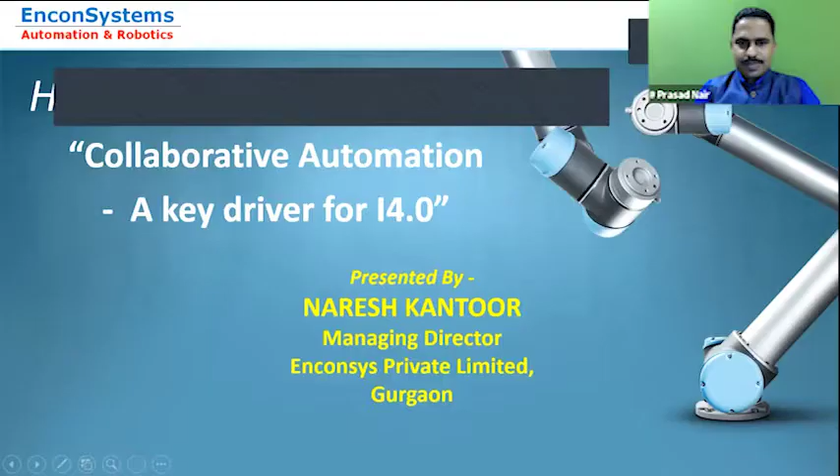Collaborative automation is one of the pillars of Industry 4.0, as Anup explained in his opening discussion. Industry 4.0 is a convergence of many different technologies, and collaborative automation is one of those pillars. Today I will limit my discussion to this particular technology: what exactly collaborative automation is, how it functions, and what are the various applications in industry and outside industry where it can be used, so that you get a broad idea about this subject.

When we say collaborative, what does it exactly mean? Collaborative automation solutions allow people and robots to work closely and productively together. Let's take an example of two friends sitting next to each other, where none of them is afraid of the other. If by chance one friend touches the other, there is an immediate reaction and both withdraw, with no chance of any accident. That is how the word collaborative has been defined.

Collaborative robots are a form of collaborative automation backbone. The word 'cobot' is derived from CO, taken from collaborative, and BOT, taken from robot. So the cobot concept refers to a robot intended to physically interact with humans in a shared workplace, meaning they can work together without any fear of each other.

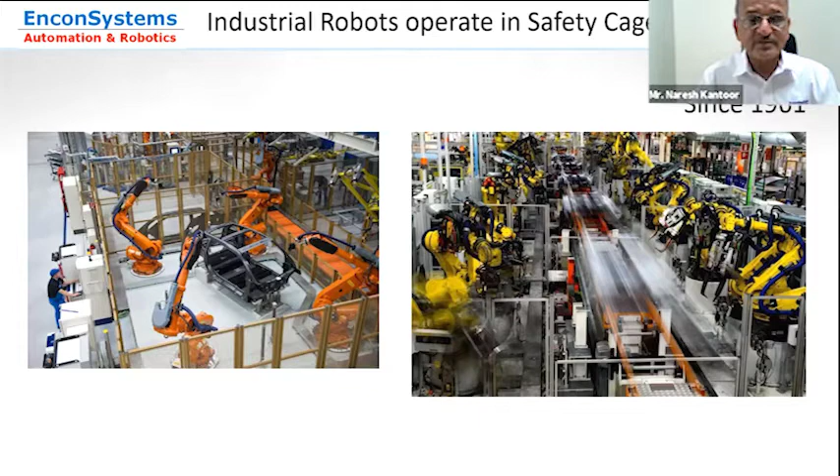Having said that, this gives a huge gap between the aspects of human intelligence and what exactly can be used by robots. The two pictures show this divide: on one end you have robots in a manufacturing setup kept inside cages, and on the other side you have operators working independently without any automation devices in the assembly section.

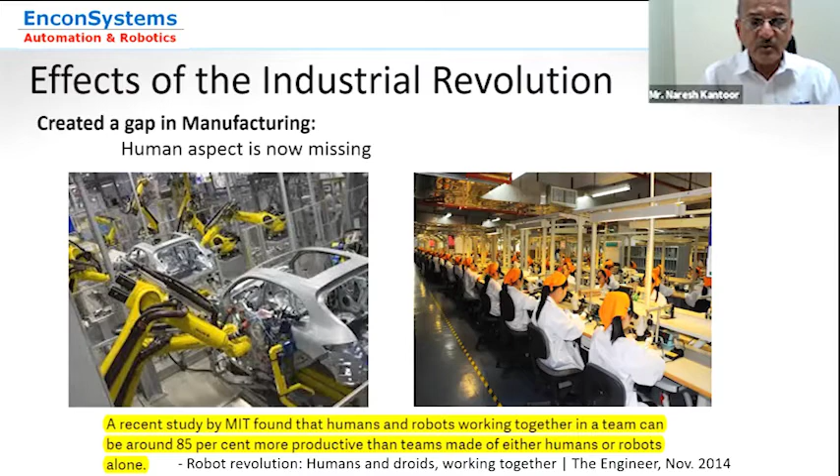A study carried out by MIT found that if robots and human beings work together, there can be a recovery of up to 85% of the muda, that is, the time wasted in between. An 85% recovery of muda is a huge amount. So we need to find a way for robots and human beings to work together.

This is because these cobots are built with an inbuilt force-sensing mechanism, which you can program from 50 to 200 Newton. In case anybody comes close to the machine, the robot will immediately stop.

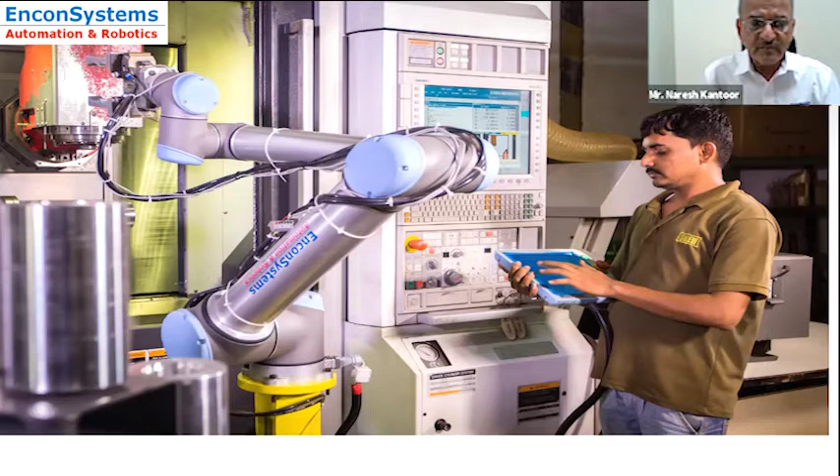And then you restart, it will start from there onward. So it's a very safe equipment to use as a collaborative robot.

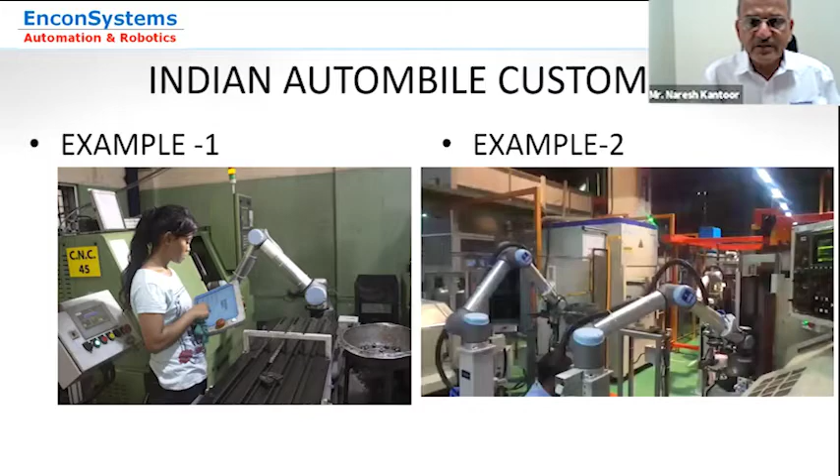Some examples of collaborative robots being used in the manufacturing setup, where they are used for machine tending applications. The picture on the right shows a person sitting between two collaborative robots without any fear, and on the left, a girl programming the robot just standing next to it without any safety fencing. There are several examples in industry where the robot does the mundane routine job, and the human does the job requiring more intelligence.

They are devices which consume very low power. Generally, all the cobots work on single phase, 230 volts, and draw power of up to 350 watts. I'm repeating, 350 watts, compared to industrial robots, which generally work on 3-phase and draw close to 3 kilowatts of power. So these are devices which are very good on power saving and very easy to program.

We generally say that if somebody who can use a smartphone or a tablet can easily do the programming of this type of robot. They can work in a very confined space because the base for mounting these collaborative robots is very small.

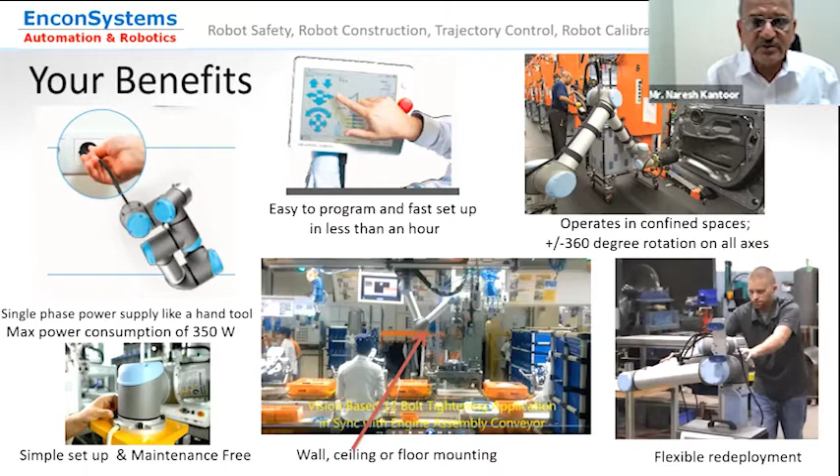Easy to mount with 4 bolts, it can be mounted from the roof, from the wall, or from the floor. And the best part is it can be mounted onto a trolley and taken from one machine to another like a tool, with a docking arrangement so it can run on a machine. If that machine is idle and you have a job on another machine, just move the cobot on a trolley to the other station and start using it by reprogramming or calling that particular program from the recipe management.

It can be used in the hospital for physiotherapy operations. Physiotherapy involves moving a hand or damaged leg up, down, right, left with a particular torque, and that can be programmed very easily. The robot can be used so that one smart physiotherapist can handle multiple patients in a single hospital setup.

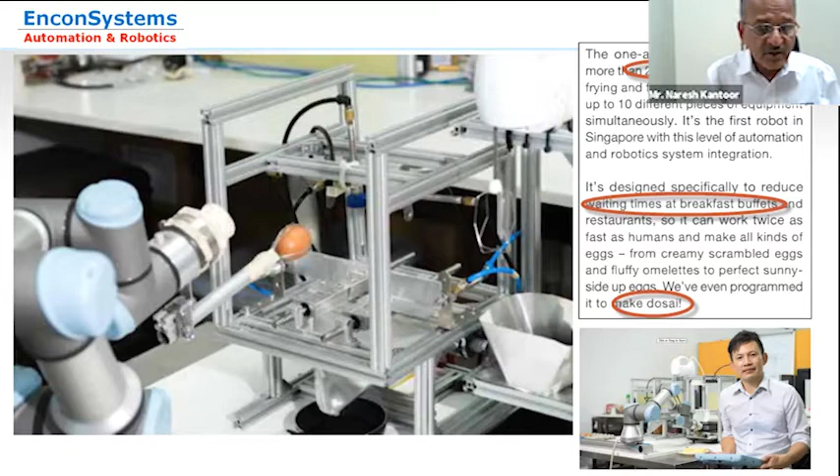Similarly, it can be used for massage, for therapeutic massage, and doctors and physiotherapists can very effectively use it. This has even been used to make omelets in a hotel in Singapore. I have seen this working, and there is a big queue to see how a robot cooks an omelet, and you can choose from various types of omelet that you would desire the robot to cook for you.

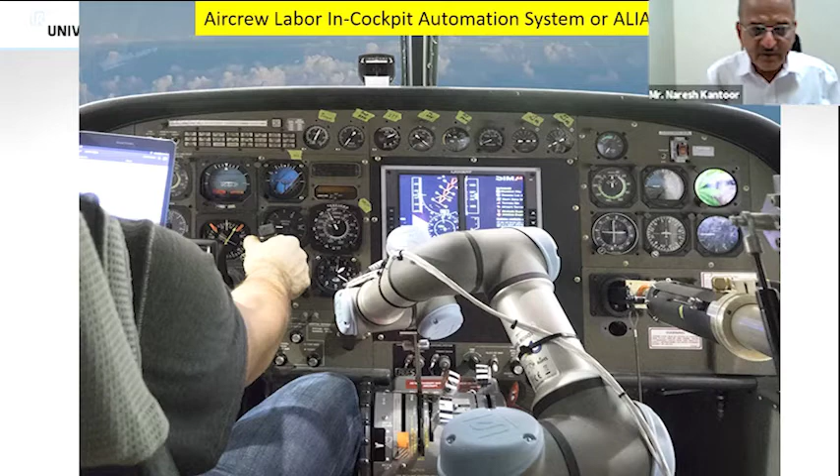Now we talk about some safety aspects of collaborative robots. Since they stop in case they touch a human being with a certain force, generally a black and yellow fencing is good enough to be put on the floor and can be controlled by some sensors, so that if anybody enters into that fence, the robot slows down to a smaller speed, and when somebody touches it, it stops.

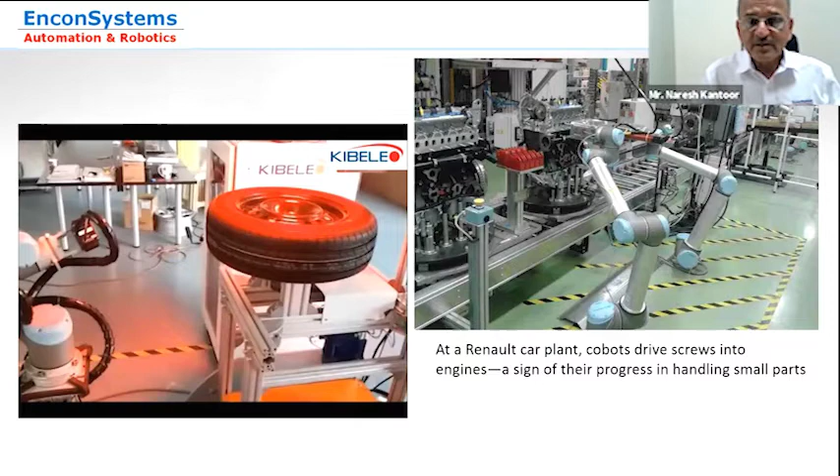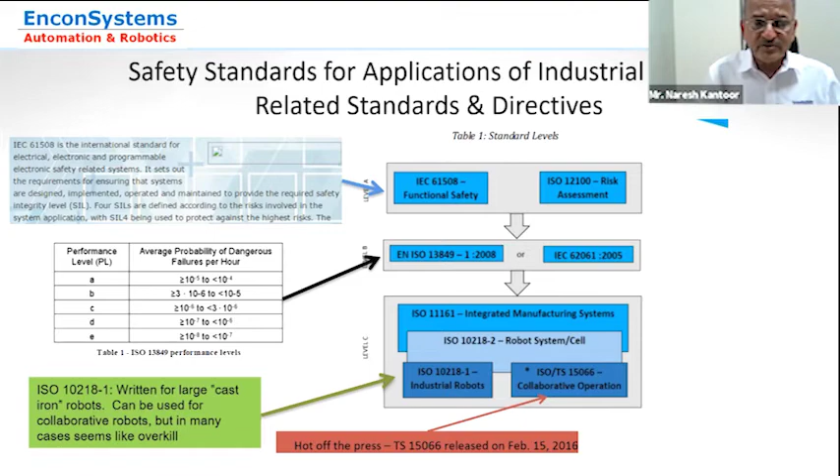The safety standard generally we follow for various devices in industrial automation - for industrial robots, we generally categorize under ISO 10218-1, which requires complete use of category 3 PLD type of safety, where complete fencing is required. Whereas collaborative robots are configured with the ISO TS 15066 standard, which says safety fencing is not required, although risk mitigation is required for the type of tool being handled by the cobot. But in general, globally, not many installations use any safety fencing around the cobot.

This is one example of a collaborative robot being used where operators and the collaborative robot work together. Particularly post-COVID, there have been a lot of challenges where social distancing in a manufacturing setup has become difficult, because all the manufacturing lines have been designed so that there is minimal travel of the operator from one station to another - they are placed very closely. And if you want social distancing, you have to remove at least one operator between the two to create a space of 6 feet or more. So those are the applications where one operator can be replaced by a collaborative robot in between, and they can work together in tandem.

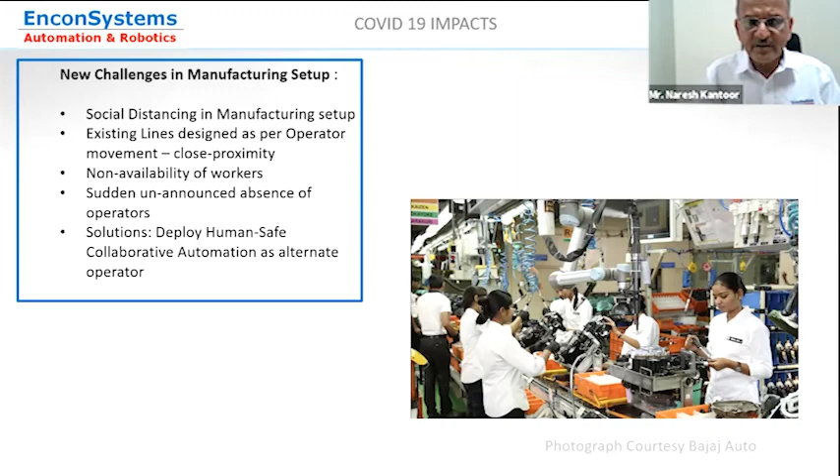Another area where collaborative robots are becoming popular is in the medical field. For example, post-COVID, now almost every time you need to go in for an RT-PCR test. And when we go for an RT-PCR test, you require a lot of health workers who are being exposed to the virus, and the risk of them getting the virus is 3 times more than anybody normally does.

So what happens is, machines have been developed where a camera and AI-based system mounted onto the collaborative robot takes a swab sample from your nose and throat directly, by adjusting its movement very precisely to go inside the nose and take a sample, or go inside the throat and take a sample. And then it goes directly into an RNA amplification process and gives you a CT figure and the exact report of RT-PCR positive or negative.

This application is becoming very popular in Europe, where they are keeping it at the airports, so that incoming passengers, when they have to be tested, can directly go to the machine and get the test done without any interference from medical assistance.

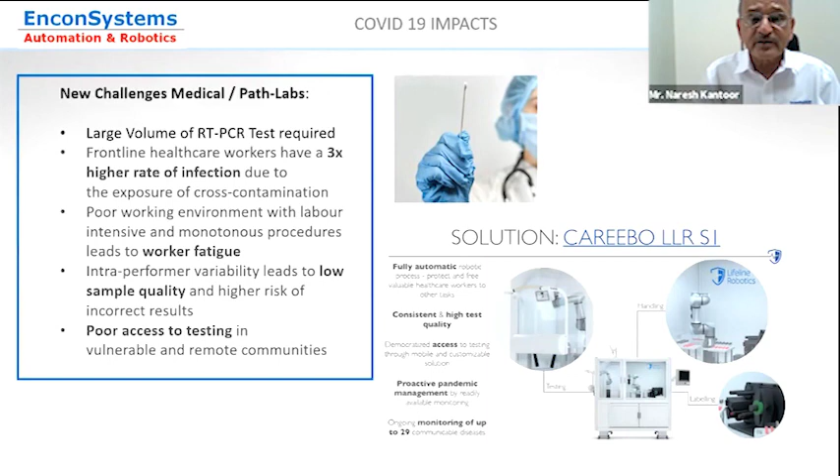So applications are very enormous in using these robots, but in 10-12 minutes I could just give a glimpse of the potential that it can do here, and then we can take it up subsequently offline wherever required. Yeah, thank you.